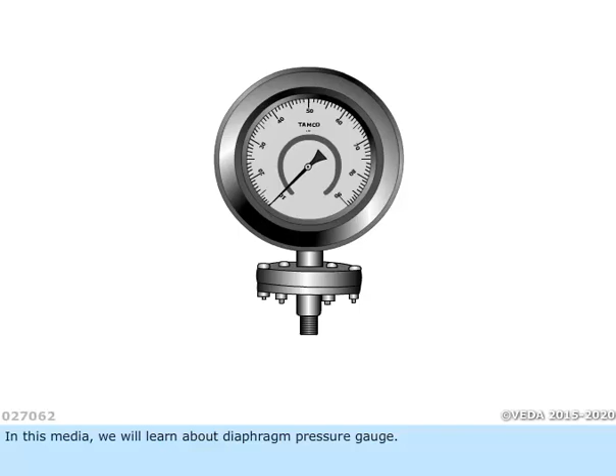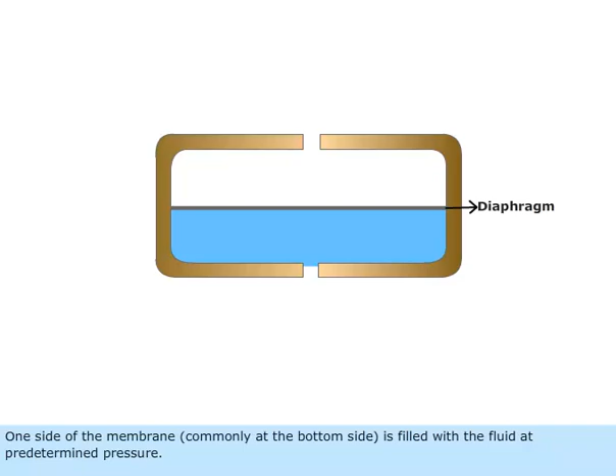In this media, we will learn about diaphragm pressure gauge. Diaphragm pressure gauge consists of a capsule divided by a membrane or diaphragm. One side of the membrane, commonly the bottom side, is filled with the fluid at predetermined pressure, and the other side is filled with the fluid or gas whose pressure is to be determined.

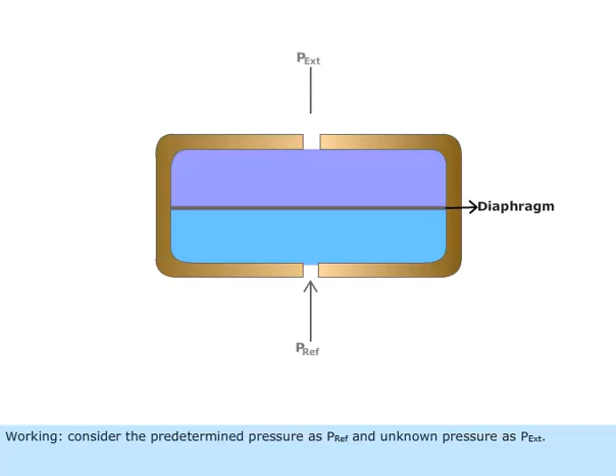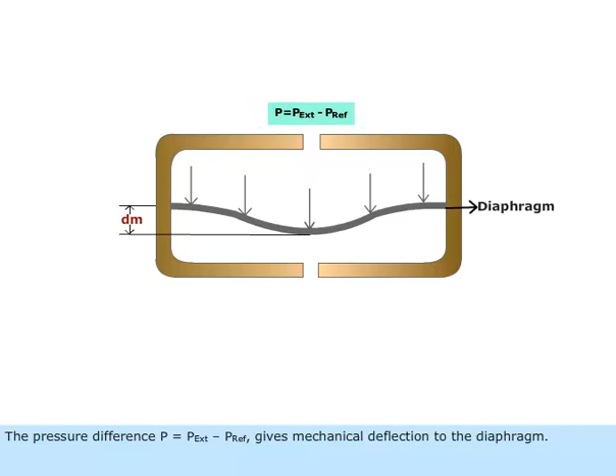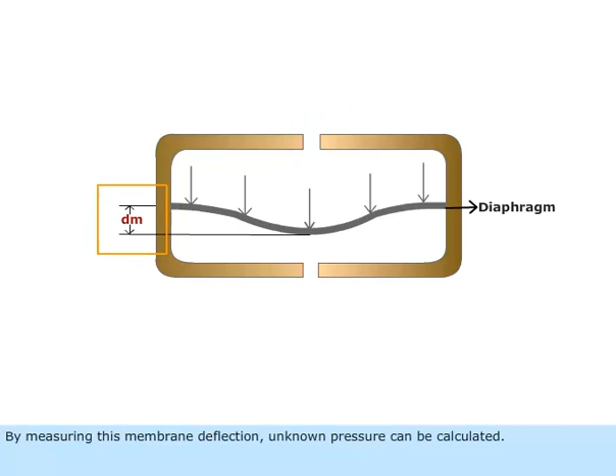Working. Consider the predetermined pressure as P_ref and unknown pressure as P_ext. Pressure difference P = P_ext − P_ref gives mechanical deflection to the diaphragm. Membrane deflection is proportional to the pressure applied. By measuring this membrane deflection, unknown pressure can be calculated.

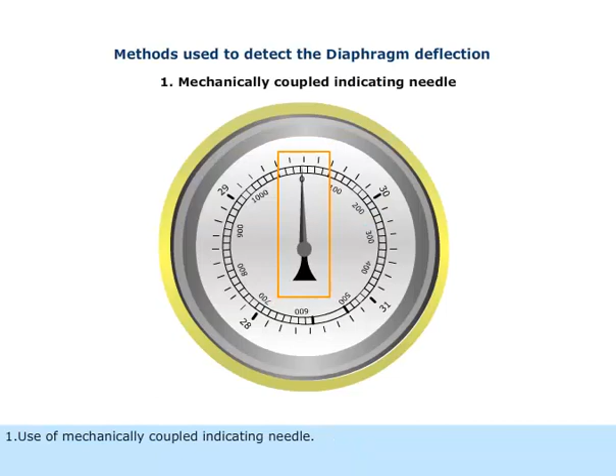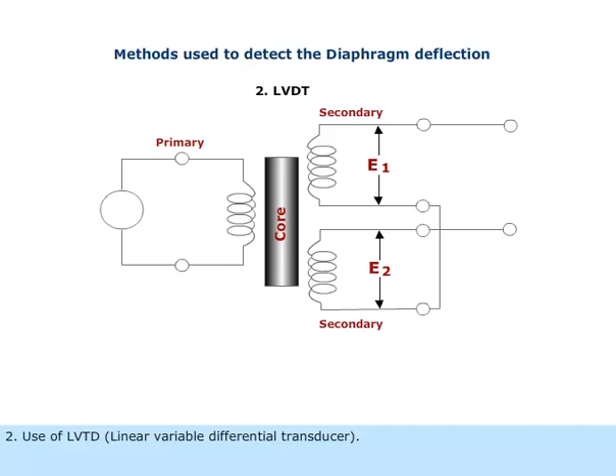There are a number of ways to measure this deflection. 1. Use of mechanically coupled indicating needle. 2. Use of LVDT, linear variable differential transducer. When LVDT is used to find membrane deflection, diaphragm is connected to the core of the LVDT.

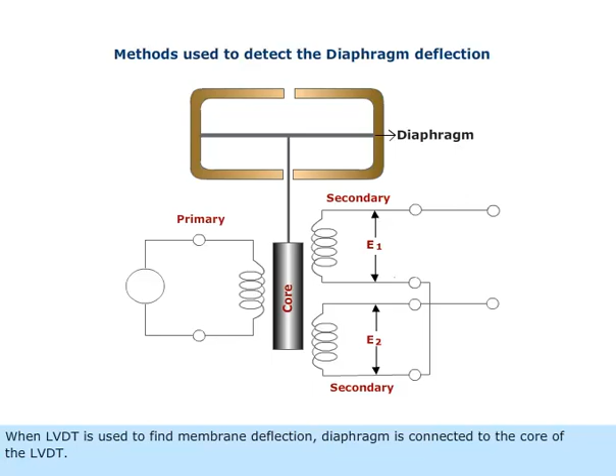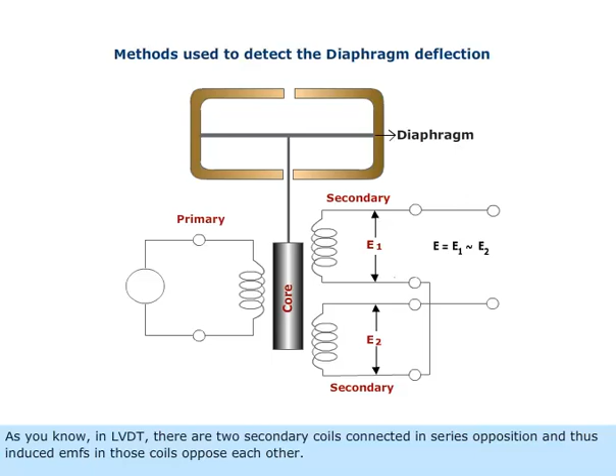As you know, in LVDT, there are two secondary coils connected in series opposition, and thus induced EMFs in those coils oppose each other. So, the resultant EMF is zero at normal condition.

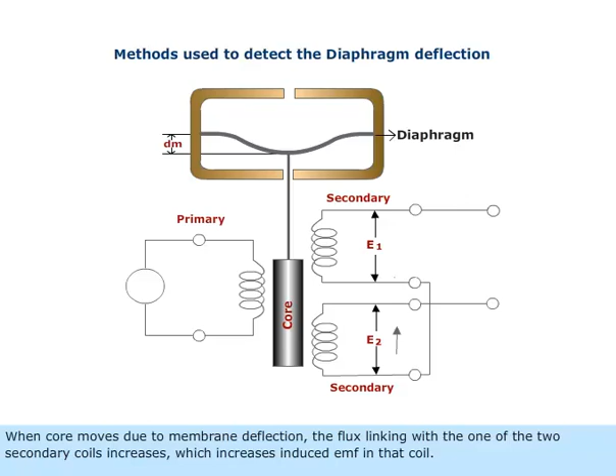When core moves due to membrane deflection, the flux linking with one of the two secondary coils increases, which increases induced EMF in that coil. So, there exists some resultant EMF. From that, we can determine deflection, and thus pressure can be calculated.

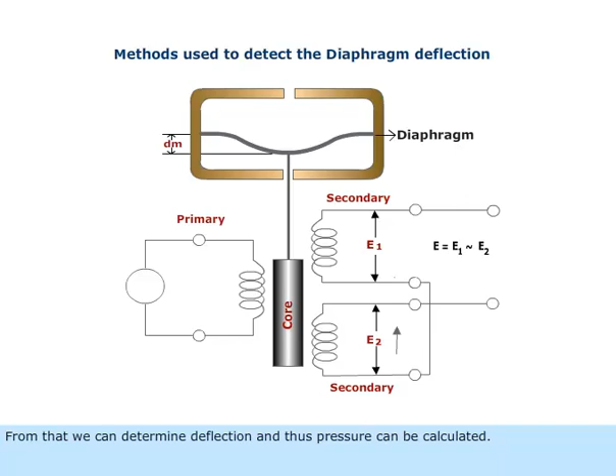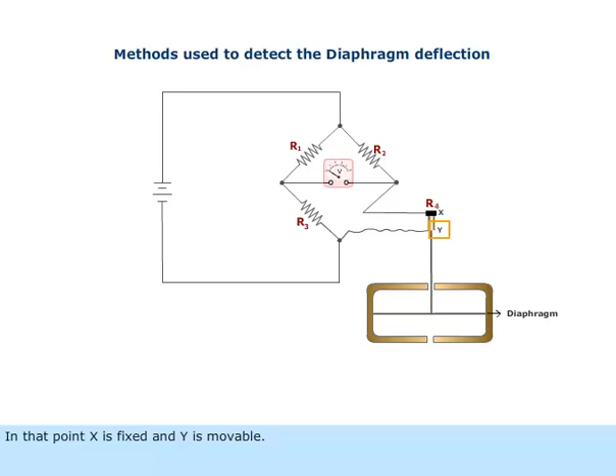3. Use of strain gauge. An electric resistance strain gauge is used to measure the membrane deflection. It has one long resistor strip XY connected to the diaphragm. In that, point X is fixed and Y is movable. As the diaphragm bends, it stretches out the resistor from XY to XY'.

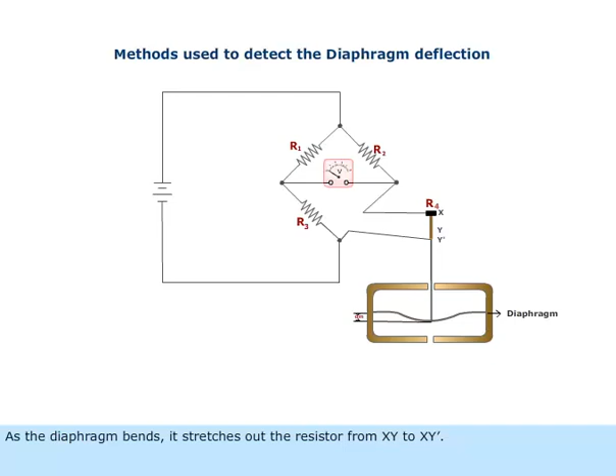This stretching causes reduction of area of cross-section of the strip and increases its length. Hence, the resistance value of the strip increases. Reference formula R = ρL/A. The increase in resistance causes unbalance in the bridge, which shows indication in the voltmeter.